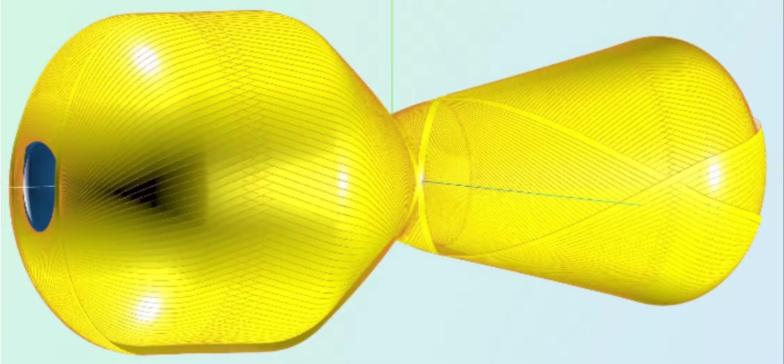Let's consider the winding of such a product as a small attitude control thruster. Combustion chamber and nozzle, a single surface with a tight throat. Convex-concave generatrix. We are setting up the winding calculation. What makes this one different from any other convex-concave mandrel?

Scale and purpose. This isn't a structural tank or a mast. This is a precision component that operates under extreme thermal and mechanical loads. Every layer of tape must be placed with intent. The throat is the critical section. It's where the flow chokes, where the heat flux peaks, where the stresses concentrate. And it's also where the winding process is most constrained.

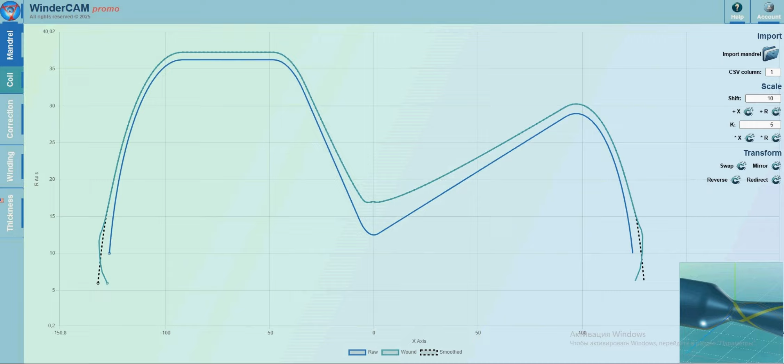We load the profiles. Set initial pole opening radii, injector side and nozzle side. WinderCAM computes the geodesic trajectory. The winding angle there is around 80 degrees. The tape crosses nearly circumferentially. That's unavoidable. It's dictated by the ratio of the pole radius to the throat radius. Clairaut doesn't give you much room to maneuver.

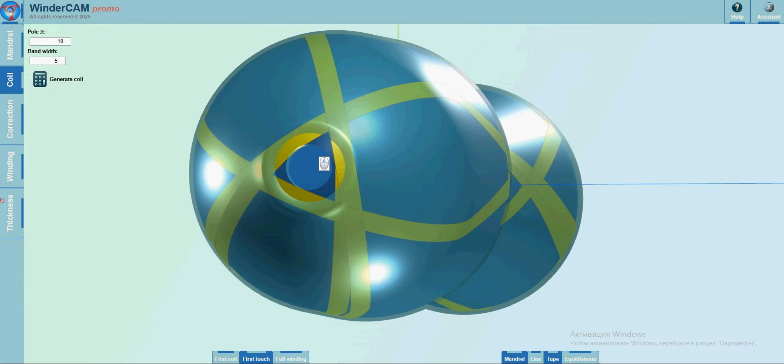So what's the challenge? The challenge isn't whether the tape crosses, it will. The challenge is what happens on the other side. The carriage kinematics. The thickness distribution. The layer-to-layer evolution of the surface. And ultimately whether the finished part meets spec.

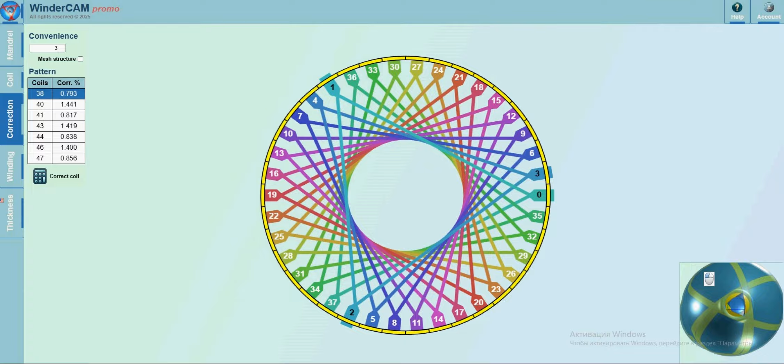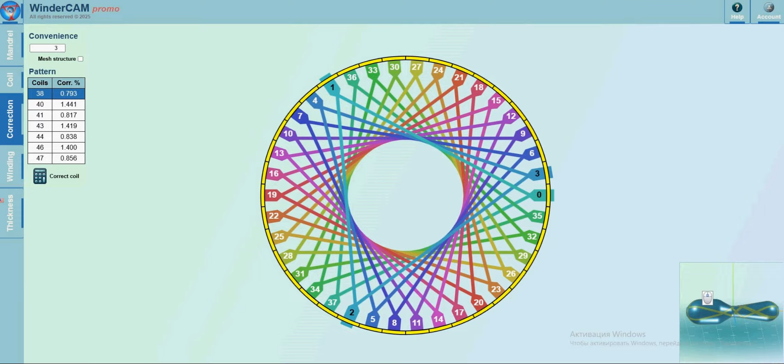People think the difficulty with convex-concave mandrels is the geodesic constraint. It's not. The constraint is clear: our pole must be less than our throat. Once you satisfy that, the trajectory exists. The real work begins after that, which is designing the winding sequence.

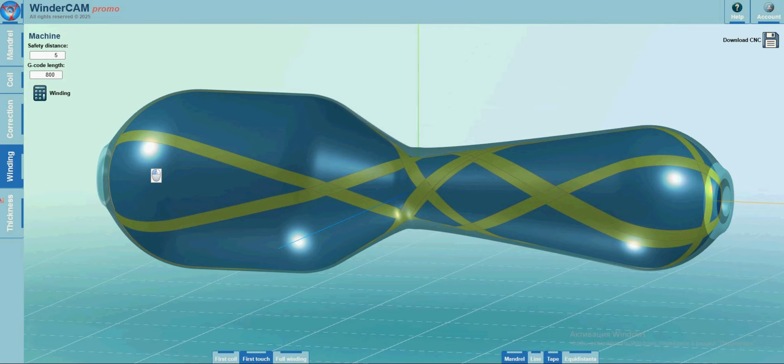How many layers? What angle for each? Which direction? Do you alternate helical and hoop layers near the throat? Do you accept a small carriage reversal if it gives better coverage? These are the questions that determine whether the part works. Not whether it's windable, whether it's well wound. Exactly. Windable is a low bar. Well wound, that's an engineering achievement.

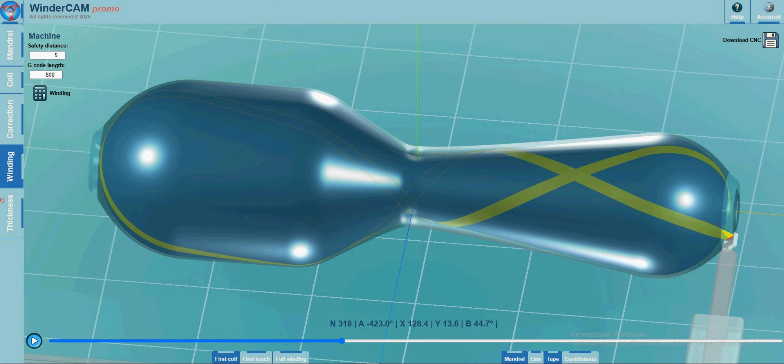Now consider the multi-layer problem. After the first layer, the throat geometry has changed. The radius is larger by the thickness of the tape. The Clairaut constraint relaxes slightly, your R-throat has increased. But so has the outer profile everywhere else. Each subsequent layer sees a different mandrel. So the winding parameters should evolve layer by layer.

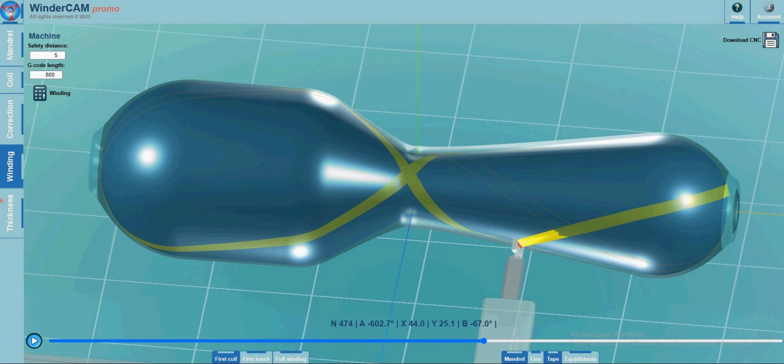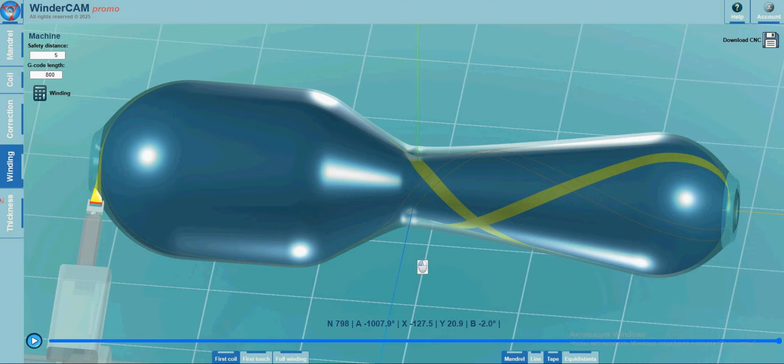Ideally, yes. You might start with conservative pole openings on the first layer to ensure clean passage through the throat. Then, as the throat radius grows with each layer, you can open up the pole radii, steeper winding angles, better coverage, faster deposition. WinderCAM tracks the accumulating thickness and lets you adjust parameters per layer. You're not winding a fixed mandrel, you're winding an evolving one.

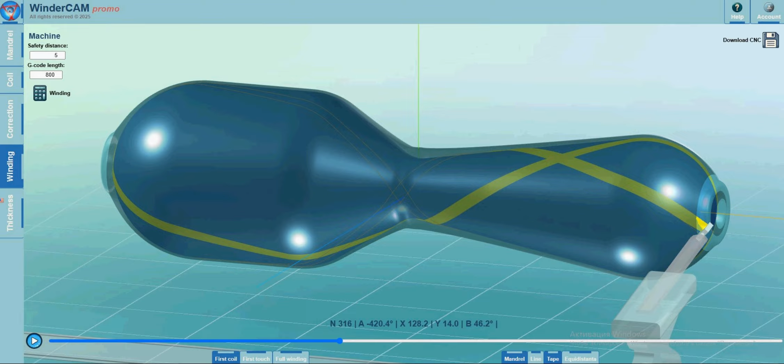This thruster is just one example. The same principles apply to any convex-concave component with a functional throat. Rocket nozzle extensions, both solid and liquid motors. Venturi flow meters for the oil and gas industry. Pinched aerodynamic ducts in UAV airframes. Necked pressure vessels for satellite propulsion.

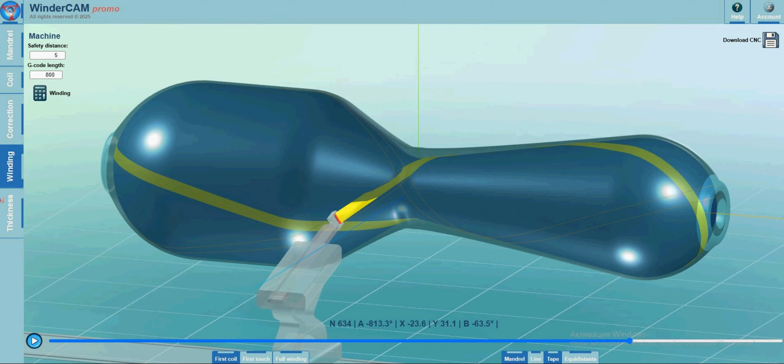Anywhere you have a constriction that serves an aerodynamic, thermodynamic, or structural purpose, it must also survive the manufacturing process. So the winding process becomes part of the design, not an afterthought. That's the shift. 30 years ago, the designer drew the profile and the manufacturing engineer figured out how to wind it, or not. Today, with tools like WinderCAM, the designer iterates the profile and the winding parameters together.

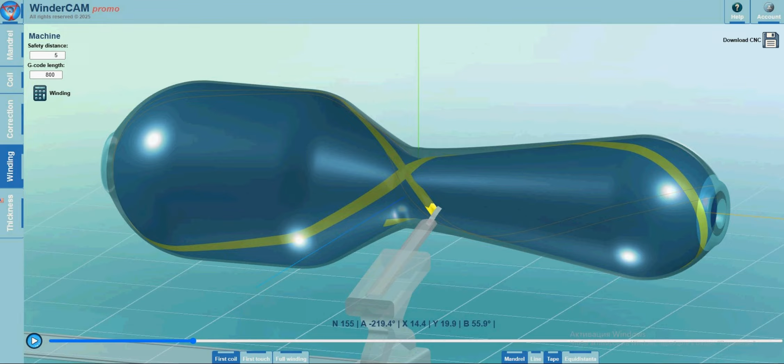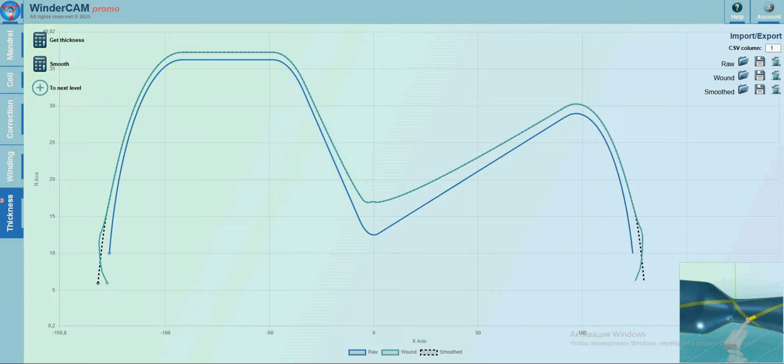The manufacturability feedback is instant. The throat geometry, the pole openings, the layer sequence, they are designed as a system. WinderCAM turns winding from a trial and error craft into a predictable engineering process. You vary the parameters, pole openings, layer angles, sequence. You see the trajectories, the coverage, the thickness accumulation. You find the operating window. The window is narrow, but it's there.